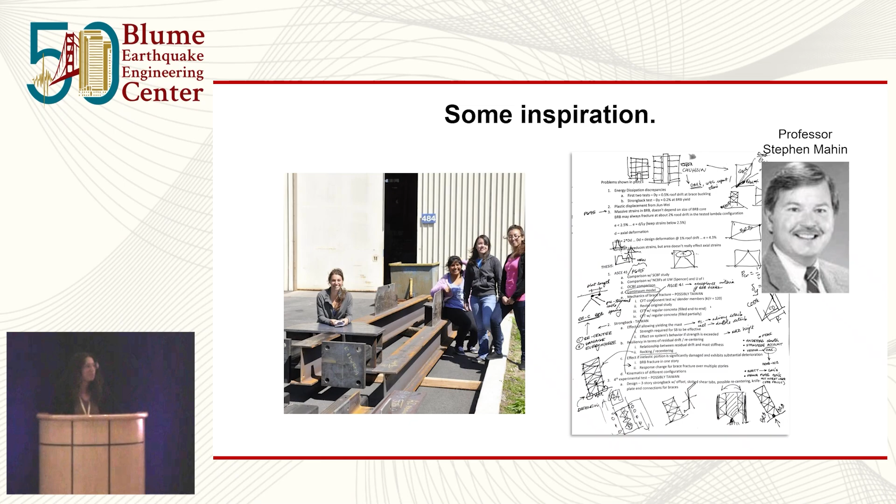You'll see in our lab we do a lot of different things, a lot of it being this effort to look at creativity and structural design from a different lens. Akira Seki's in the office, he does a lot of work on the offshore wind side that we've been doing studies in. Gustavo Rojo is also in the audience, he does some of that work, as well as Shan Razi who does a lot of work with accelerated computing and real-time simulations. Given that this is a Blume event, I'm going to focus on this first piece.

Classically in structural engineering, we've thought a lot about earthquake engineering, but I think we all know that's starting to shift a little bit - firstly in terms of more hazards, and secondly in terms of climate change. So I specifically want to focus this on the creativity we can ground in maybe some traditional ideas, and broaden our scope as well.

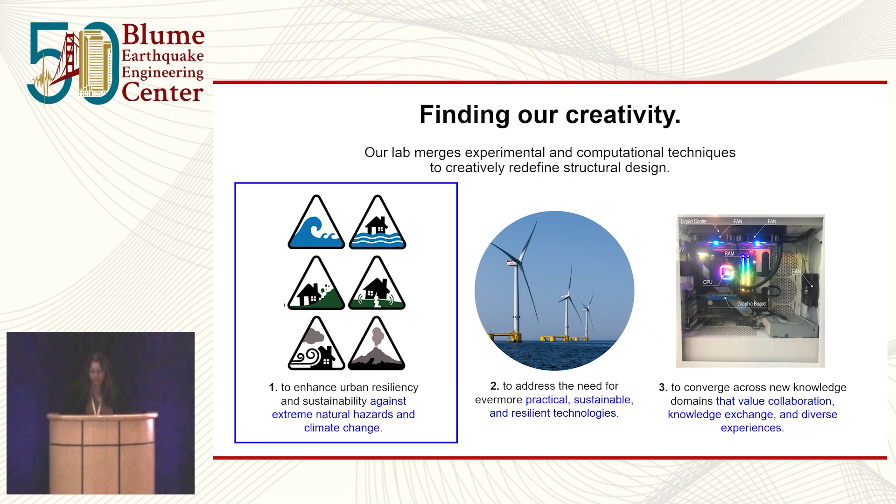So classically, we've been hearing a lot about this in the talks today. We've been really focused on experiments and testing for life safety and collapse prevention. This was a test done, and this talk is going to be geared a little bit towards mass timber, done at UC San Diego by John van de Lindt as part of the NEES-Soft Project - very dramatic. I want to say this was like the 10th shake they did, and they were trying to collapse it.

But I think it points out an interesting piece, that a lot of our research in the experimental realm has really focused on what the existing building stock is like, how do we design right now, and then what does that damage mean. It focuses a lot on the damage piece.

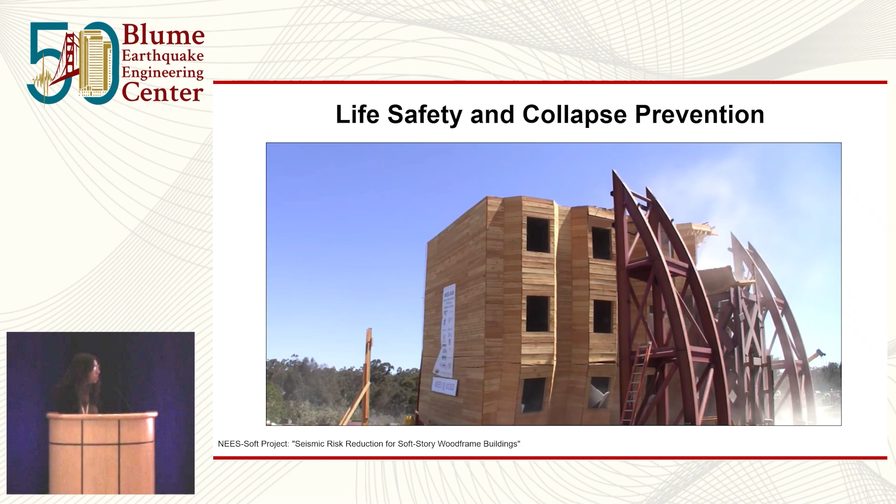So I think what we're seeing, and you can see that from a lot of those talks, is yes, the damage piece is very important, but how do you also start thinking about things like resiliency of communities, functional recovery? You could throw affordability in there as well, in terms of the housing stock as well as the socioeconomic makeup of a community. So that's giving a lot of resiliency objectives to now define our building.

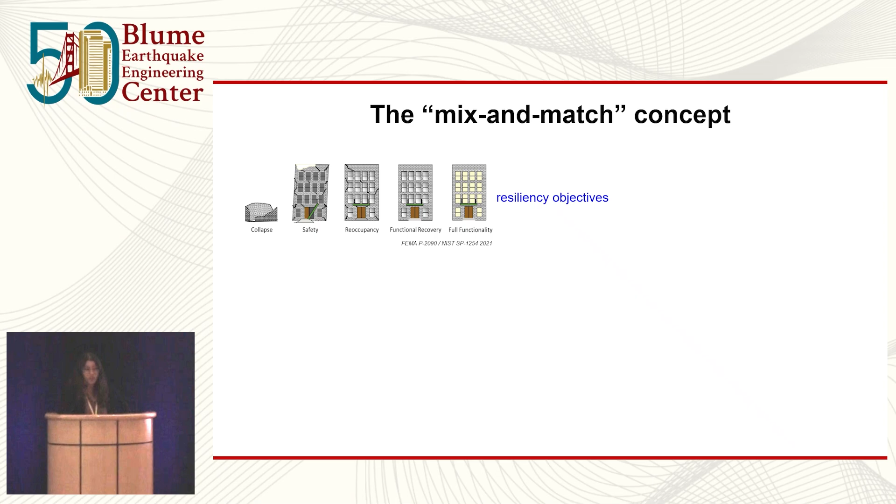So instead of just aiming for life safety and collapse prevention, we have many more metrics we might be interested in, combined with carbon emissions, greenhouse gases, the effects of climate change. There might also be some more sustainability metrics we might want to think about. I started piecing this together in my head about how this relates to creativity in our own design processes - we're dealing with significantly more metrics than we've really had to design for before, and not all of them are aligned. Oftentimes they're conflicting.

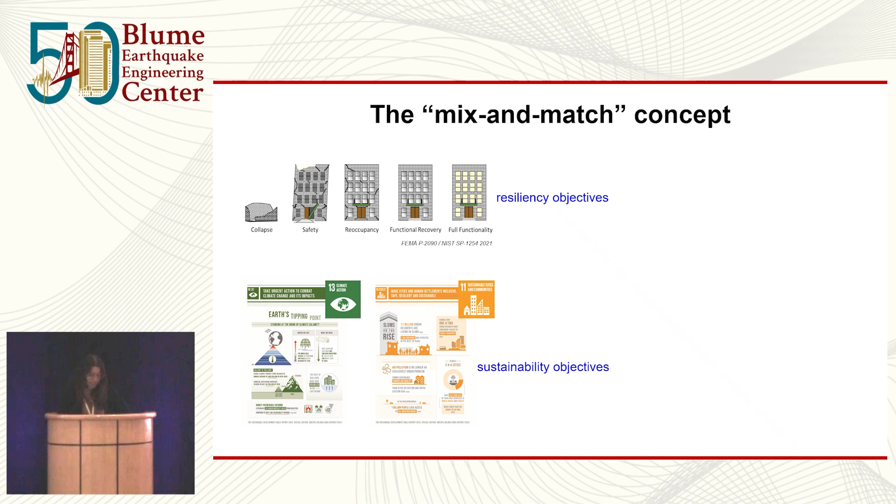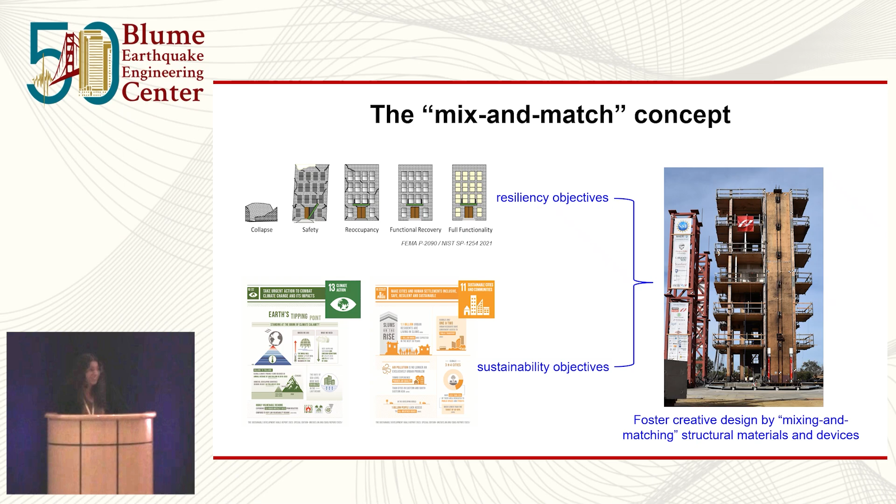So this was sort of an idea of mixing and matching that I actually got from a number of discussions with Stephen Mahin, where it was kind of this idea: we have all these objectives. Maybe instead of just having one seismic force resisting system that's somehow magically able to meet all of them, we start thinking about all the data we have, the well-established devices, the different structural systems, and start mixing and matching them to actually tailor our designs to meet very specific performance goals depending on what you want. I think there's some concepts in here that could be quite interesting in terms of thinking about creative design.

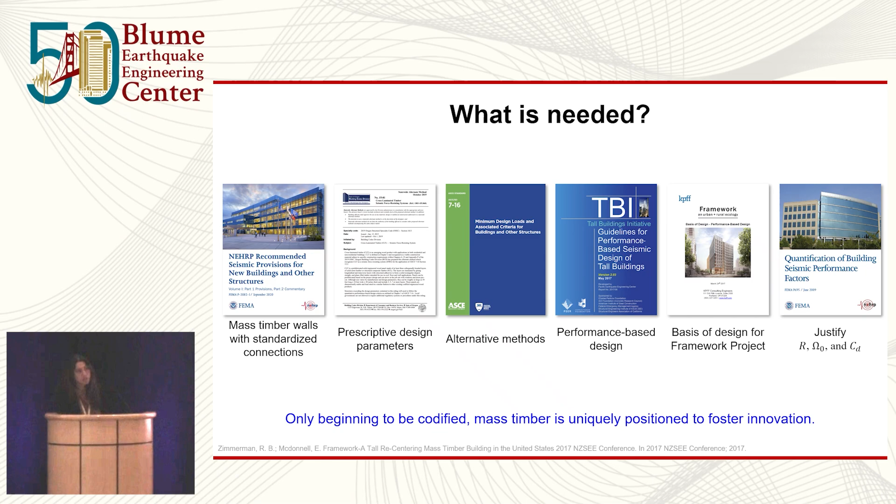So what's needed to do this? I'm going to be a little bit tongue-in-cheek here: what's needed is a lack of resistance. What I mean by that—the reason I'm choosing mass timber for this talk is it's not really quite yet codified, so there's not a lot of momentum behind it. It's the wild, wild west. They're allowing us to do whatever we want and propose whatever we want, which has its advantages or disadvantages. You can look at it in many different ways. But it allows us to propose things in terms of this mixing and match archetype that's really difficult to propose in things that are already ingrained and codified and have significant mass to change. So I'll tailor this talk specifically around using mass timber as a playground where maybe some of these ideas can then propagate to other building materials and structural systems.

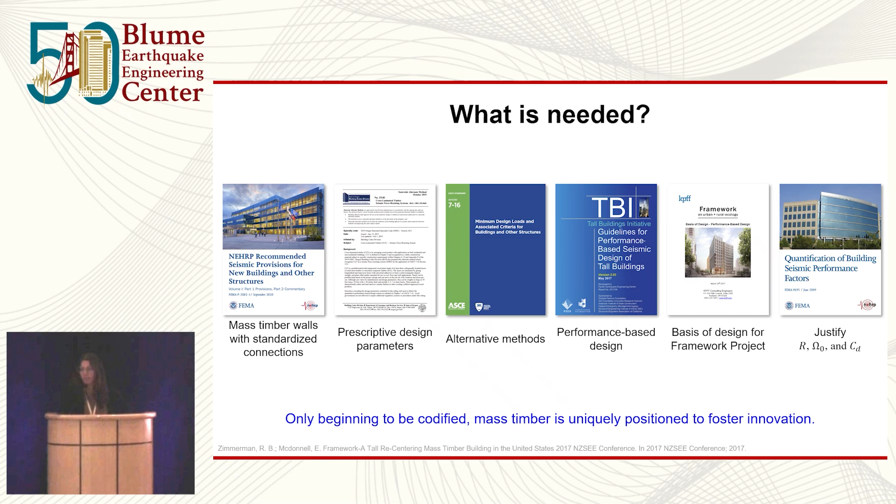So that resistance piece is not the only thing that would be needed to propagate creative design. It needs to be really well grounded in the literature and well supported in practice. A lot of my work in steel systems was not just the work I was doing as part of my research—it was also being caught on by engineers and industry. You'll see this is the image of Greg Luth's design for the Tesla Gigafactory. You'll also see some work from Tipping at the top, and I think Leo was in the audience as well. This is really important, to have the ideas actually get entrenched and make change.

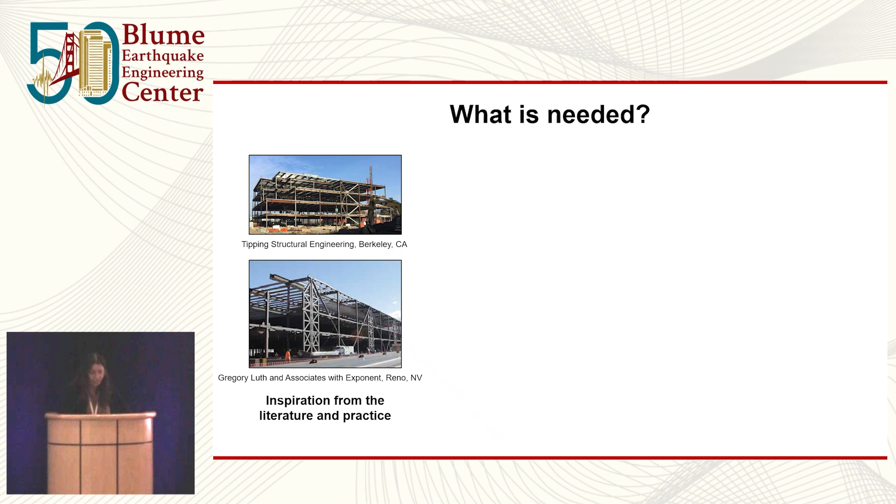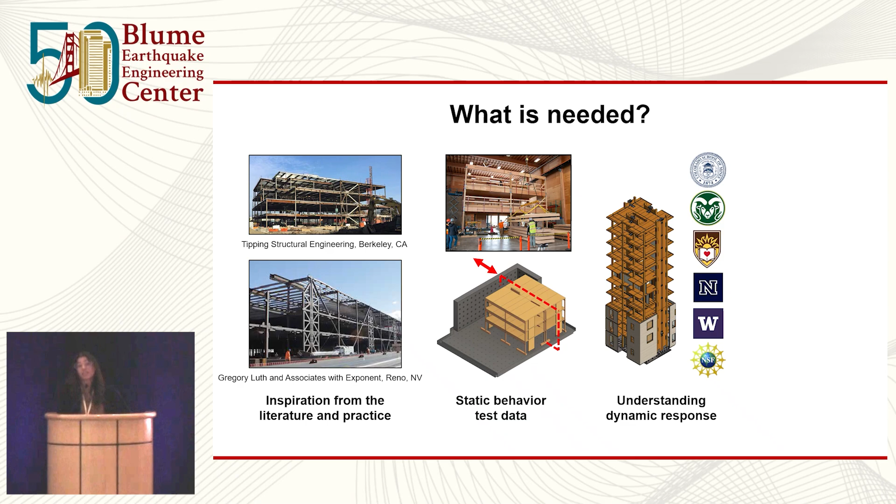The other thing is you really need to understand the behavior not only of the materials and components, but of what this combines as a sub-assemblage and structural system, and how it holistically acts as a unit. You need to really understand the dynamics of the system, going beyond traditional testing, looking at it in terms of shake table, dynamic response. And then finally, you need to do that not just for maybe a 10-story building, but also for a 6-story building, which I'll talk about in this presentation as well. You need to know that dynamic response for multiple building heights, multiple story numbers, and ideally for different types of irregularities. Then ultimately look at that in terms of the design with numerical models, where I believe the real creativity comes in. If you can get these first three pieces, then you can start really playing around numerically and coming up with something that maybe hasn't been seen before.

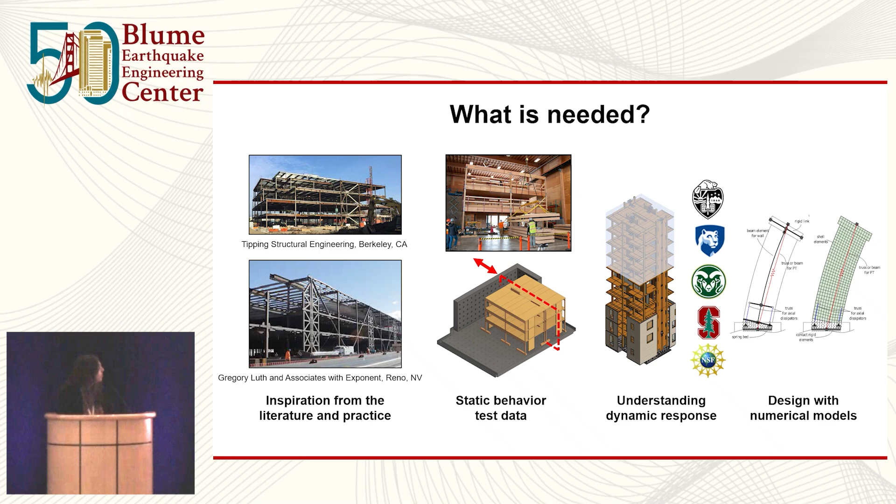So I can't talk about all of these different pieces—different people in my group have done a number of things on each one of these categories. But hopefully I can gloss over a few and focus on those last two a little bit. So let's talk about inspiration from the literature and practice.

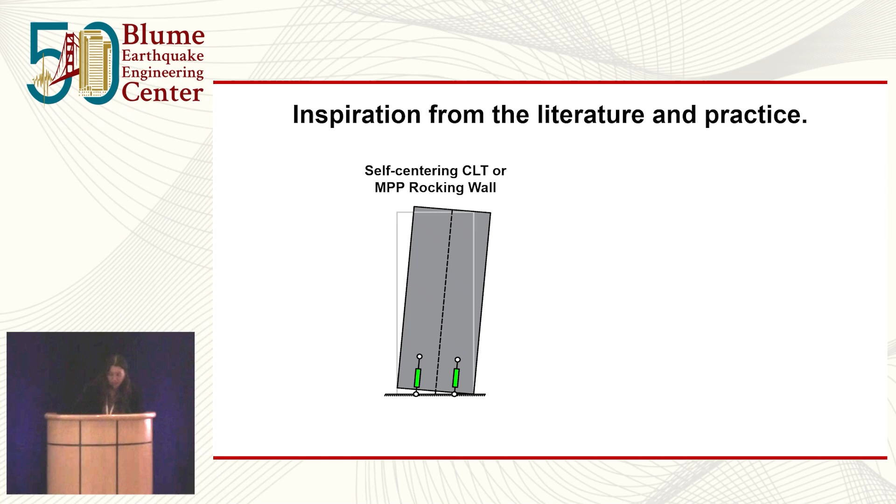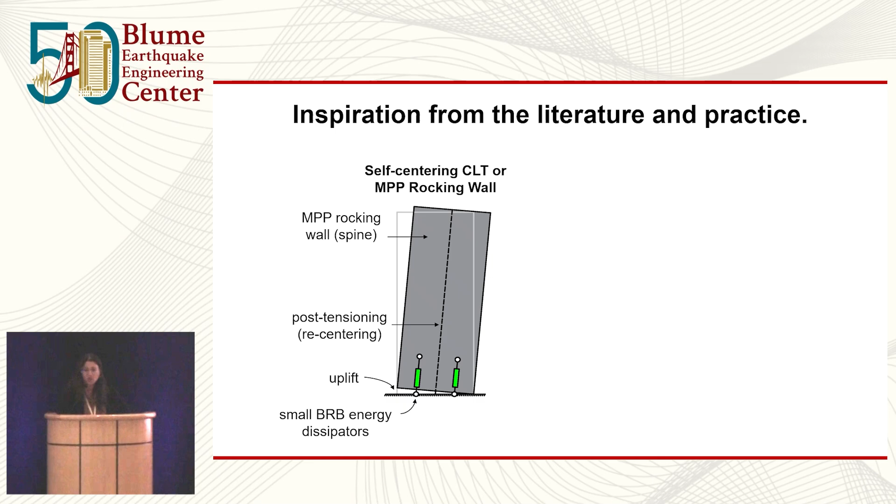So it made sense to ground some of this work in mass timber, thinking about post-tensioned, self-centering rocking walls—replacing the rocking wall component instead of a steel braced frame or a reinforced concrete shear wall with something that's either CLT or mass plywood panel, some sort of mass timber product that has enhanced stiffness and strength characteristics. There's also inspiration about these pivoting type systems that I like to say are in the same family as the rocking system. The pivoting system has a pin at the base.

It's sort of background, and there's the strong back system that I was doing with Steve Mahin. There's also similar work by Robert Tremblay in terms of the tied eccentrically braced frame. But the same concept, except instead of rocking and uplifting at the base, you have some sort of pin-based connection.

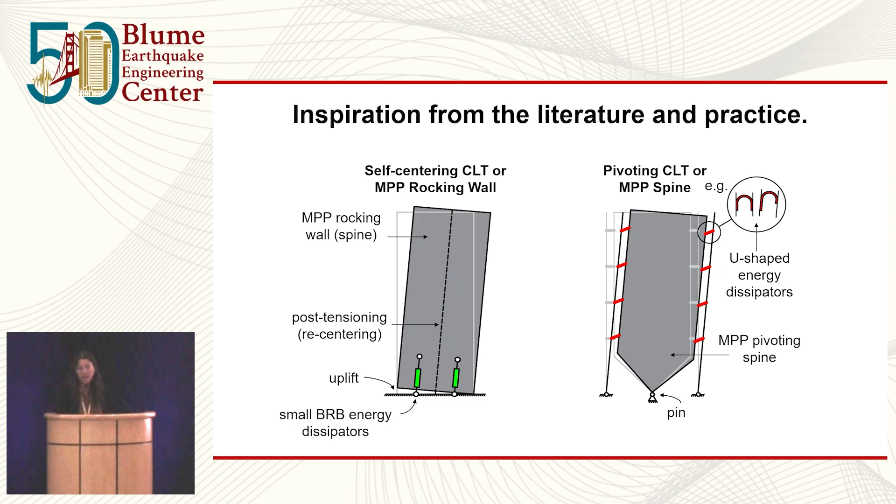But instead of a brace frame or a concrete frame, or a concrete wall, you could replace that with this mass timber product, and the idea of mixing and matching really comes into play. So we replace the elastic component in these systems with mass timber. We gain some advantage in aesthetic properties. I'll limit myself a bit when I say potentially sustainability properties, since it depends on how you slice those numbers.

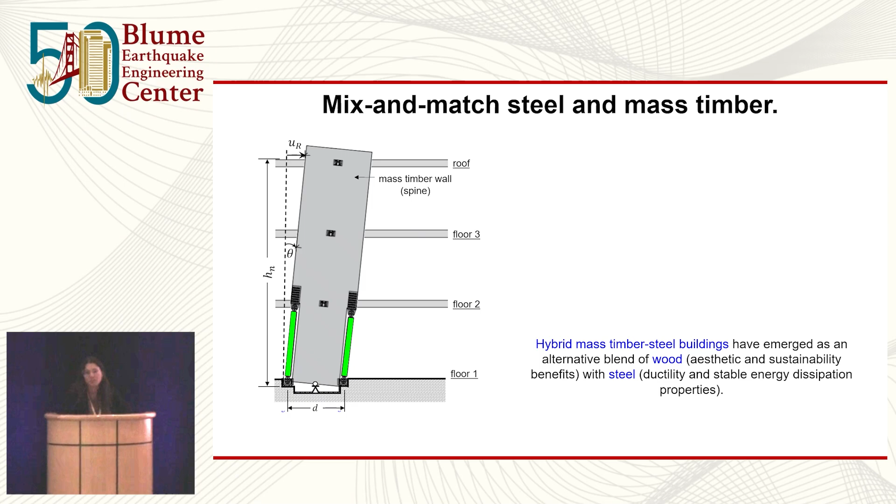But then you can combine them with something fairly well established. In this case, we were using buckling restrained braces, but we call them buckling restrained boundary elements just to have the same acronym. You can have the stable energy dissipation capacity of the braces involved as well.

So Gustavo, who is also in the audience, this is our phase 1 of this system. We designed and tested a 3-story version of this up at Oregon State University. I don't have time to go through all the details, but something to point out is that this particular system had a lot of details that took most of our time figuring out.

Because of the lack of self-centering capability, it also had residual deformations in the BRBs in this case, which means if you think about a static case with this system unloading and reloading at the same initial stiffness, you get a lot of residual deformations in the BRBs that make it not quite easy to repair after significant shaking or significant drifts.

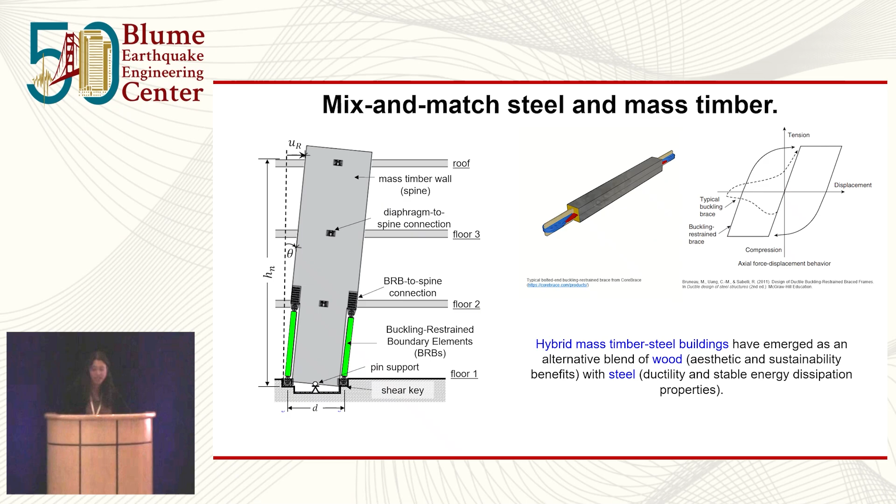I should also say there's a caveat here. For a dynamic analysis, this might look a little different and not as severe as what we did in the testing program. So this was conceptually the idea: can we look at these systems in terms of mass timber components with well-established energy dissipators coming out of the steel world?

We modified it somewhat to start addressing the residual drift component, and so we had this pivoting system on the left that was the original, call it phase 1, of this hybrid wood-steel system.

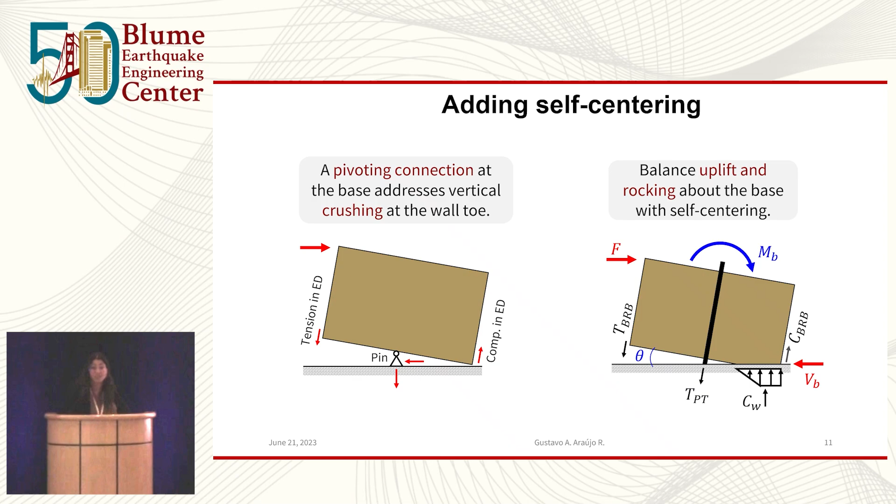And then the figure on the right was, well, let's add post-tensioning that enables self-centering and mitigates residual drifts after a seismic event. It was just easier for us to balance the overturning moment from the BRBs if we allowed it to rock in this case. So we went from a pivoting system in phase 1 to this self-centering rocking system in phase 2, and we had the opportunity to test this in a 6-story version at the UCSD shake table facility.

So this was, again, Gustavo's design - huge shout out to him on this. And then Morgan McBain, another one of my students, actually led the testing program itself.

And just to wake everybody up a little bit, I think there's sound - there's 100% actually. So this is a maximum considered earthquake event using the 1994 Northridge earthquake. It's very loud. Pretty short earthquake.

But it was tested in 3 degrees of freedom in that case. I cut out my expletives for that particular video. It's rather scary being there in person, especially when you see your own design tested.

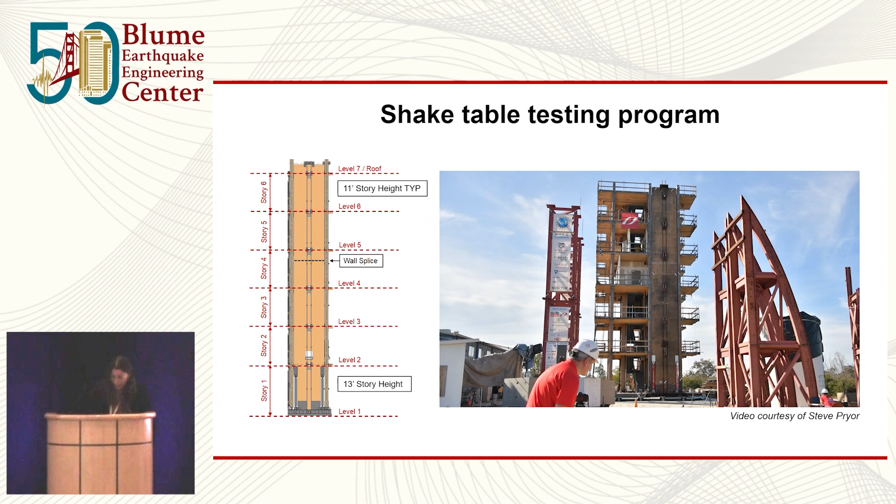But what's interesting about the dynamic response is that this particular building, if you combine it with the 10-story experiment that came before, we actually removed the top 4 stories to make it a 6-story experiment. Then we tested a variety of different lateral system designs, all of which were rocking, but this was the only one with the BRBs.

What was interesting is that it survived about 150 shakes, ranging from service level to beyond MCE. This particular system experienced 23 shakes, 18 of which were conducted by us and a few of which were conducted for the shake table tuning.

Here's the results of this. We tested with 4 different ground motions, from service level again to beyond MCE level events. The drifts, even after about 1.1 MCE using that Northridge ground motion, which is a pretty severe ground motion when scaled up that high, had pretty minimal residual drifts, completely repairable after the event.

The thing that's maybe a little bit interesting is that there were quite large accelerations that tend to increase as the intensity of your ground motion increases. That's one of the aspects of these rocking or pivoting systems you need to think about—they tend to exhibit large acceleration effects.

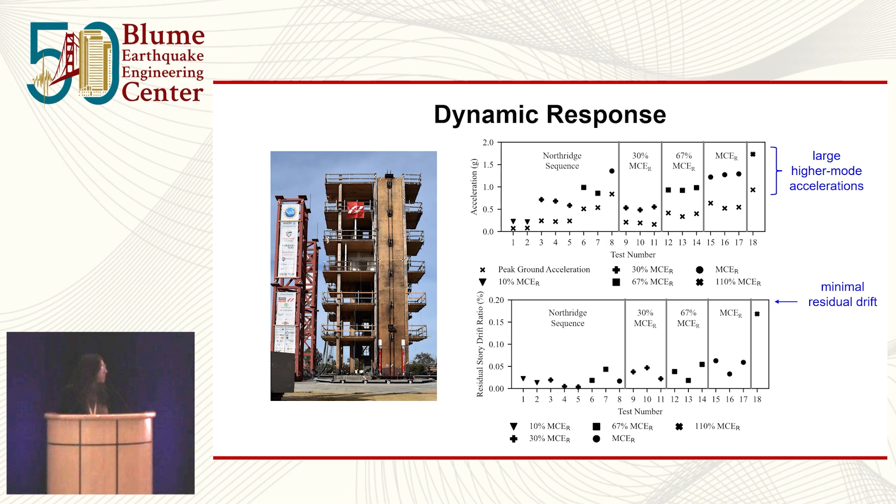Which leads me to one of the last pieces. This was testing we did in collaboration with a number of U.S. institutions and also with the Japanese at the E-Defense Shaking Table Facility. Brian Massadio, also in the audience, was the student working on this project. In this case, there were a number of hospital components distributed in the building. This isn't quite the same as the mass timber system, but it has that pivoting spine, this time made of steel.

I want you to look at the difference between the uppermost videos and the lowermost videos. The uppermost videos show just the raw action of that pivoting spine. The lower version is us adding higher mode mitigation—again, just adding more components to the system, this idea of mixing and matching.

You'll see quite a difference in terms of the non-structural response. You can see very large higher mode accelerations exhibited in the upper video, and that's pretty well mitigated in the lower videos. Keep in mind that most of the non-structural components you're seeing here are actually not designed to withstand pretty high Gs, so that's something to think about. We managed to have almost negligible residual drifts, but on the non-structural side, that's still something that needs to be considered.

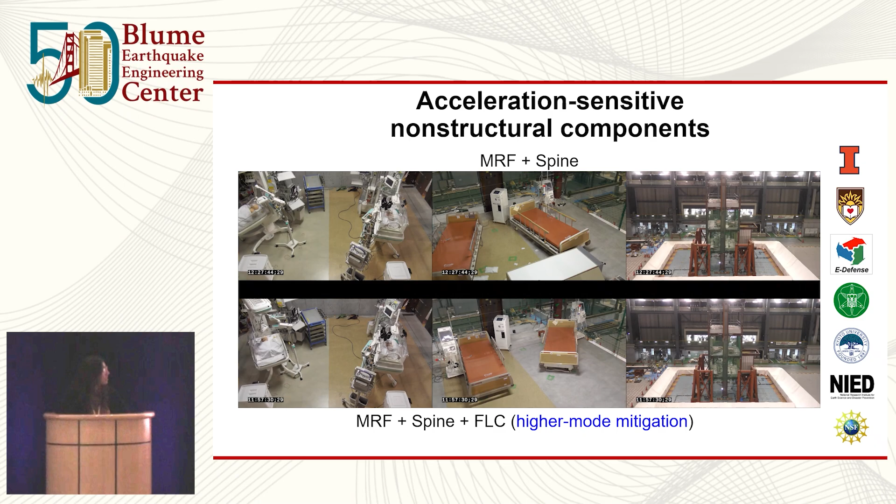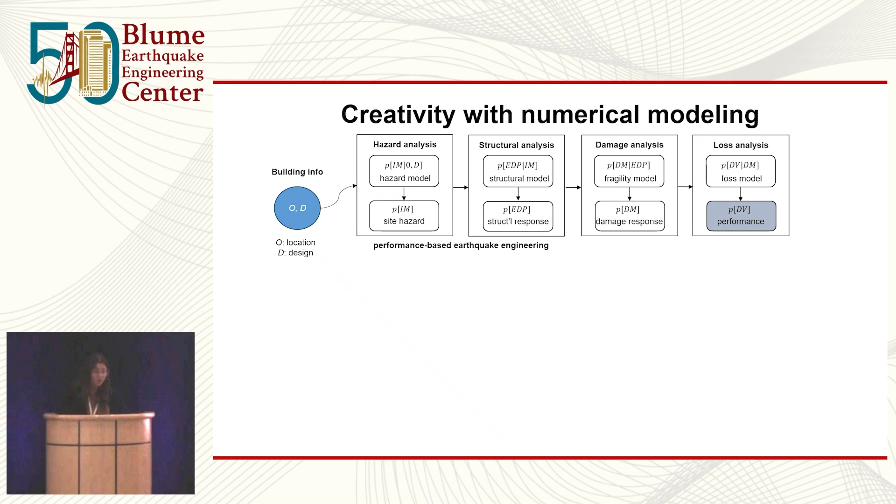So that brings me to this last piece—a diagram developed by one of my students, Morgan McBain. I think we've all seen performance-based design integrals many times, so that's something we're very familiar with. When we think about having well-established numerical models grounded in physical testing data, and adding in a component like life cycle assessment, we've been sort of trapped into thinking about design as a forward analysis kind of process.

So you have some location, you have some design at that location, you check its loss in terms of deaths, dollars, downtimes—or if you prefer, serviceability, sustainability, and safety. And then you could potentially check it in terms of a life cycle assessment to look at greenhouse gas emissions, embodied carbon, etc.

But what we're starting to think about is, if you have enough data to build models you can actually walk backwards from, perhaps instead you can start at the metrics—say, these are the metrics I want, which might be competing a little bit—and then walk backwards to give you a potential design space you can choose from.

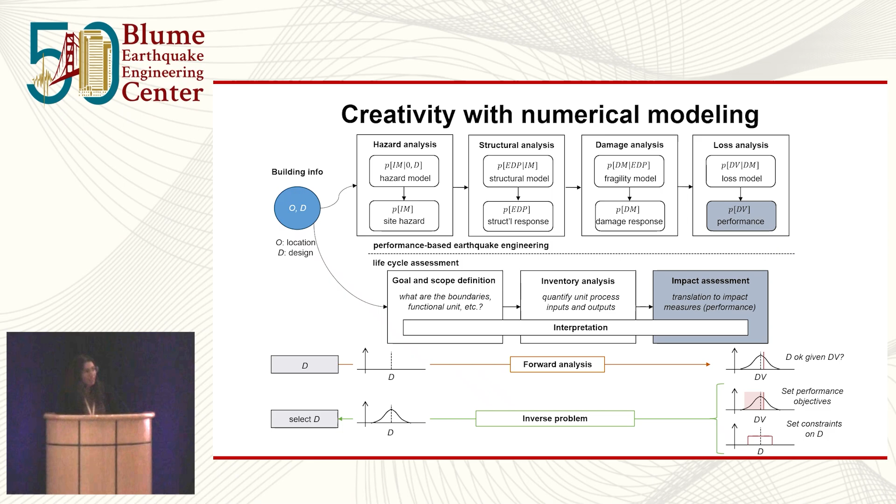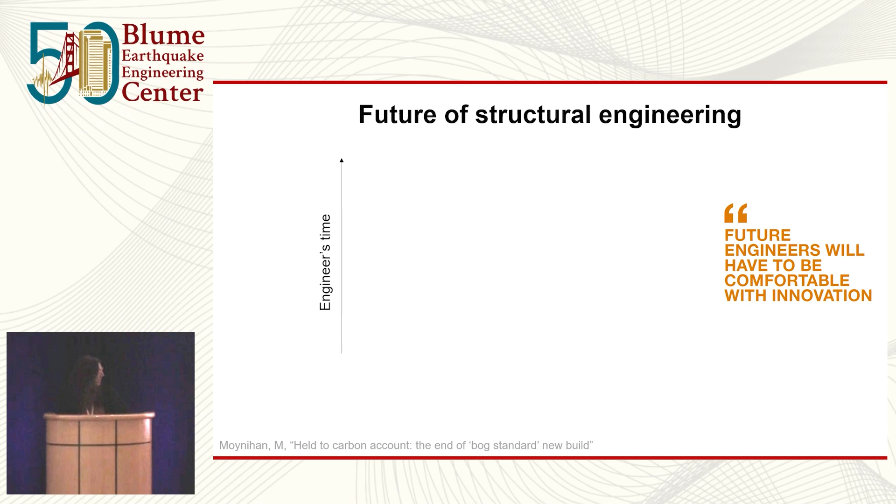This leads me to the last piece in rounding out this presentation, when it comes to creativity and design. I think we need to change how we're thinking about structural engineering. What I mean is, we have engineers' time on the y-axis, and typically this concept of creativity and innovation on the left, design and analysis in the middle, and interpersonal communication and engagement on the right. Very classically, we've spent a lot of time in this middle part.

I think the reality is that that's not going to be the case for very much longer, which means we need to figure out where to spend our time in these other realms. I want to end on this idea of what the future generation is going to have to contend with, as they have more data, faster models, and more design choices, doing less of this middle piece—and what that means for us when we think about structural engineering as an industry.